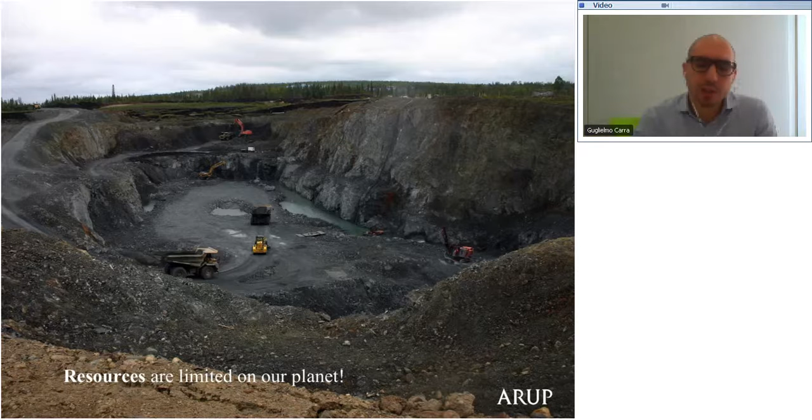So let me start with this image. The starting point of my presentation is the understanding of the fact that the world's resources are limited. So it is now understood that the traditional business model, which is linear and based on the constant exploitation of resources - things are made, used and disposed of - should actually change towards a model which is circular, in which things are regenerated and reused at the end of the life cycle. That's something that, for example, the energy business already understood many years ago, when about 25-30 years ago, part of the business moved towards the use of renewable energy resources, such as solar energy and wind energy. My point of today is: can we conceive a similar approach in construction and use materials that are renewable and can be regenerated?

So can we create high-performance systems and components from abundant resources that we have in nature, such as plants? And when I talk about plants, I don't mean trees, which are usable of course, but I rather think about plants that grow in our cities and on our farms. So with this idea and with these questions in mind, Arup joined back in 2011 a large European consortium of 12 other large European institutions and companies to actually explore further and research further this idea.

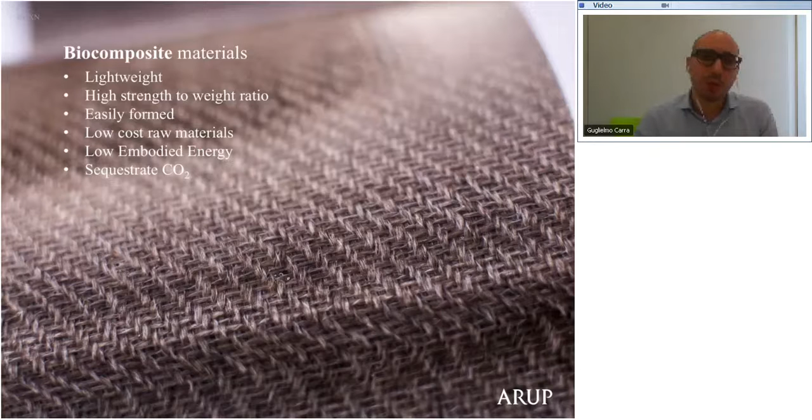What we have been doing has been thinking about using these materials at a larger scale in building construction. This implies that we should be able to improve the performance of these materials, both from a mechanical point of view and from a physical point of view, to make it possible for them to be used within the very stringent requirements of building construction.

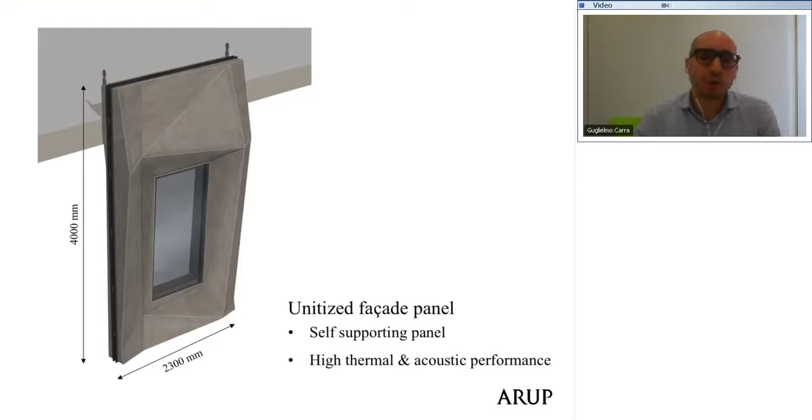So here you see one of the first systems that I want to show you today, which is definitely the most challenging: a modular unitized facade panel, 4 meters high, 2.3 meters in width. It's a self-supporting panel designed to achieve high thermal and acoustic performance.

If we look at the exploded view of the system, it is composed and designed to have two skins of biocomposite, one on the outside, one on the inside, connected to a timber frame all around the perimeter of the panel, with thermal insulation in the gap. The panel itself also has a glass unit.

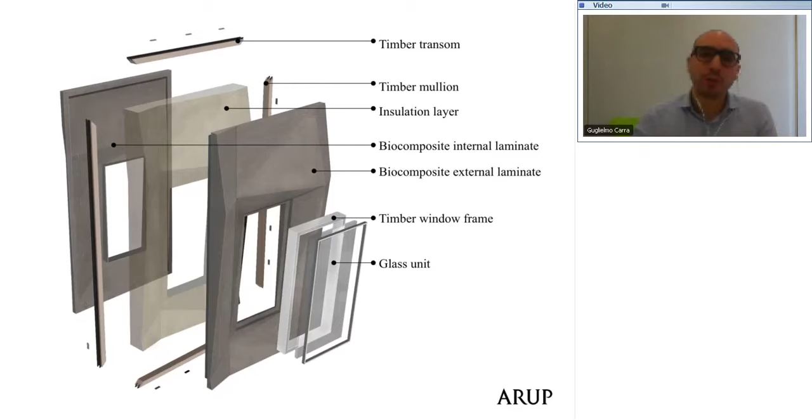The particular shape that you see here has been designed in agreement with the architect, 3XN, and there are two main reasons for this very complex shape. On one side, the idea was to improve the solar gain of the panel using a parametric approach, by modifying the top part of the panel itself.

As you see, there are two red dots, and we've been moving these red dots outside and inside the panel. With a parametric model, we've been calculating and assessing how much light was actually reaching the window.

By doing that and optimizing the shape, we optimized the solar gain for the panel for North European countries; in particular, we did the simulation for the city of Copenhagen, so that the part which is in shadow through the full day actually fits with the solar and energy requirements of the building itself.

The same approach can be changed for any city worldwide, and this particular effect we can play with the shape is guaranteed by the biocomposite being a material that is easily shaped into any form we might think about. I will come back to the process of manufacturing biocomposite later on.

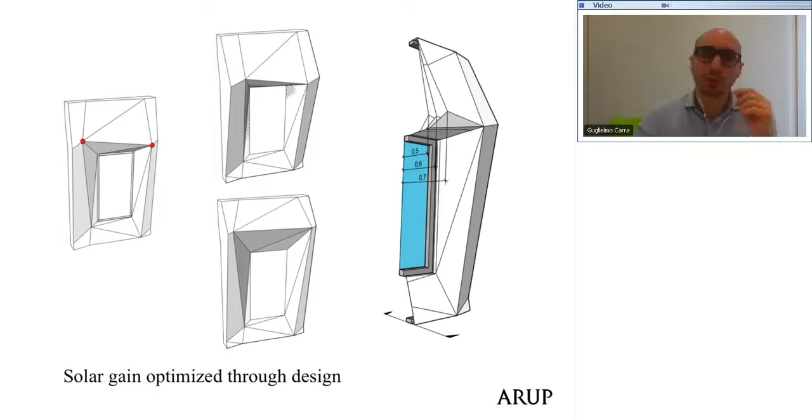On the other side, as I was mentioning, the particular shape of the outer skin was optimized to improve the stiffness of the biocomposite laminate. We did some structural calculations, and we proved on paper that the overall deflection of the system was fulfilling the requirements for building construction, even at the local level, with values above L/200, which is the deflection requirement for European systems.

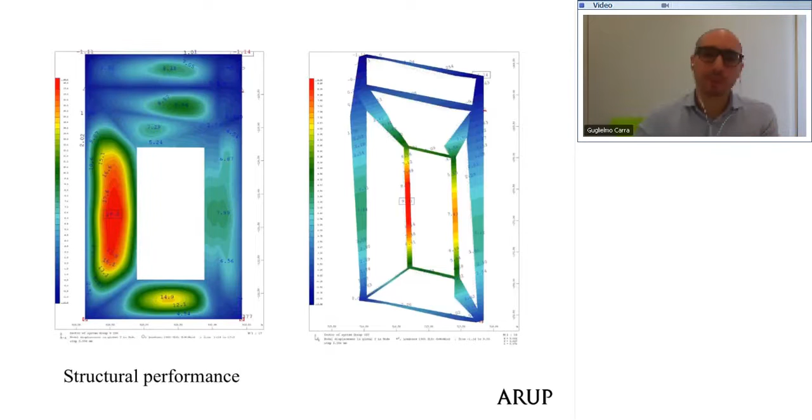Another very particular feature of biocomposite is its low thermal conductivity value, which is comparable to, and even lower than, timber. By using biocomposite, we reduce the number of thermal bridges in the panel itself. Therefore, the system performs far below passive house requirements. The total U value was about 0.38, compared to the 0.8 average for passive house standards.

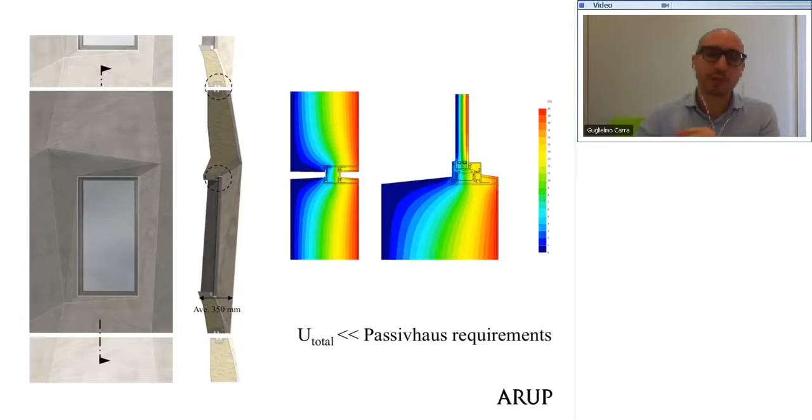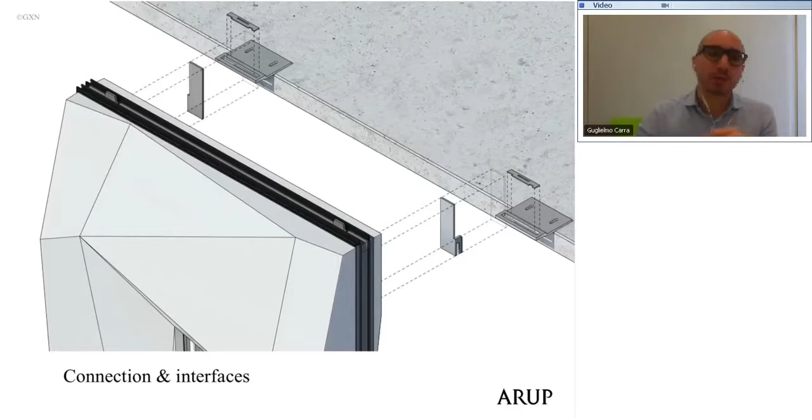In this image, you see that for everything not related to the shape and the system itself, we've been using traditional systems, for example the gasket line and the fixing system with the floor slab, because we wanted this panel to be potentially implemented in projects, which is something we're still looking for.

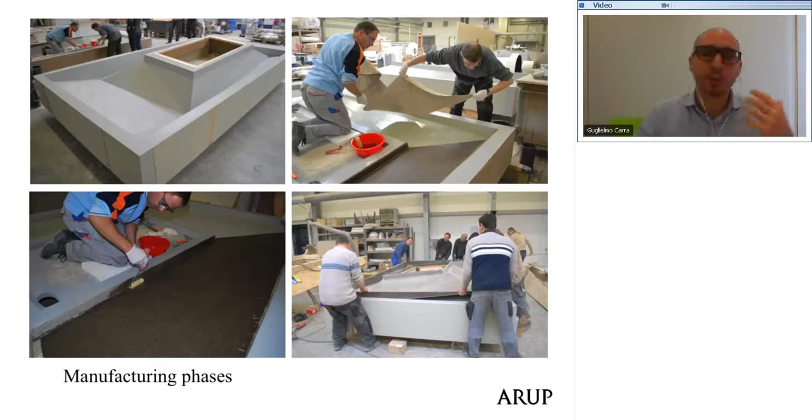Of course, this process is very labor intensive, so it has been used only for the phase of mock-up for the system. But nowadays, we can use processes which are much faster, improving the speed of construction and also reducing the cost of the system.

And here you see the laminate, the external laminate as completed. It has been a very long process to get to this stage, about 30 months of research together with the full consortium to optimize the performance of the material and the process, but finally we managed to create this very large outer skin for the panel in biocomposite materials.

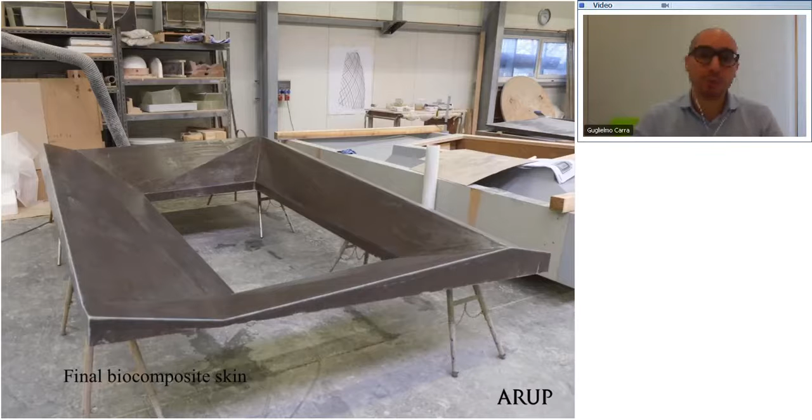We've been using, for this specific case, flax fibers. Here are two images of the mock-up completed, and these represent the first worldwide unitized facade panel made in biocomposite materials. If you look at the image on the top right, the zoom, you would actually see the very nice texture of the fiber right below the outermost layer of resin, which is a clear resin in this specific case.

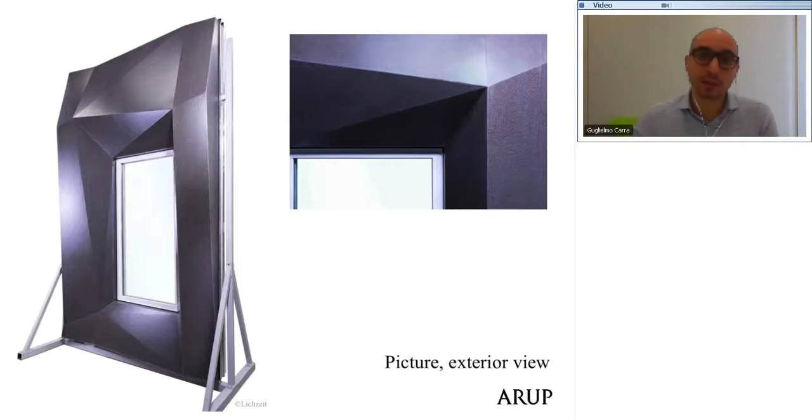At the end of the manufacturing process, we entered a phase of testing. Of course, we wanted to prove that biocomposites are suitable for being used in construction. So we have been testing this system according to the European technical regulations.

Here you see two images. On the left side is a wind pressure test, so the panel is facing the chamber, and on the inner side of the chamber wind pressure is applied. What is very interesting is that the overall deflection and the local deflection for the laminate and the panel has been far lower than what we anticipated. So the assumption we made during the design phase for the performance of the biocomposite was actually very conservative. The material can even do better, we can even think about doing larger things.

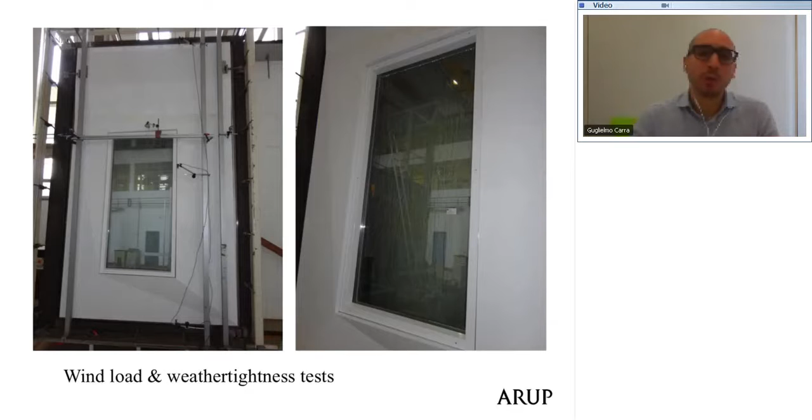We also exhibited this system in the UK, in London, in March this year, to showcase to a large community of people visiting the event the opportunity offered by biocomposite materials.

Coming back to the first point about the limited resources available on our planet and the fact that we want to develop materials which are actually recyclable, we approached the design by thinking about the disassembling of the system itself at the very end. So, as shown here, we believe the biocomposite skin can be completely separated from the other components of the system and separately recycled into the biological cycle, while all the technical components, the metal parts, the fixing systems, the rubber gaskets, can be recycled separately into the technical cycle.

Of course, this point is very crucial. In fact, for the biocomposite to be recyclable it shall go through a number of checks, and not all resins can be recycled. So a proper selection of the resin according to its use in building construction shall be done.

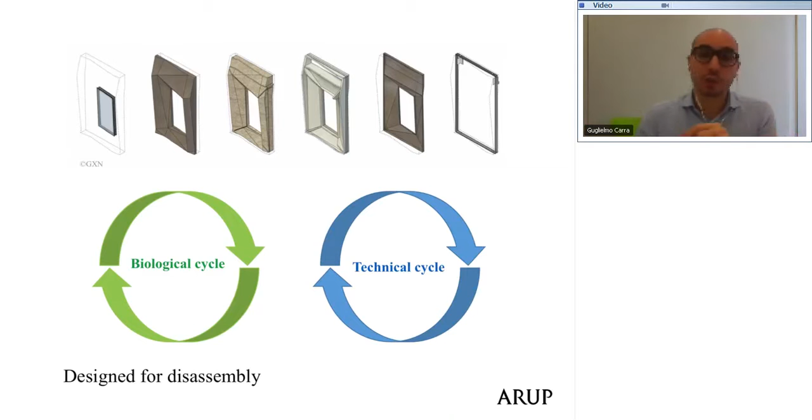I want to show very briefly the other three systems we have been developing together with this large unitized facade panel.

The first one is biocomposite rain screen cladding, and this shows the flexibility of biocomposite to be used in a number of applications in building construction. On the right side you see the mock-up that we showed at EcoBuild in London, and on the left side, the concept of the system.

It works as two components in biocomposite coupled together. On the outside, there is a very large flat panel in biocomposite. In this case, we use a resin called furan, which is obtained from sugarcane waste. So nothing from the plant is trash; the waste, called bagasse, can be used to make a resin. On the bottom side of this flat panel, there is a stiffening profile, also made with a linear production process in biocomposite, and these two parts are fixed to a metal substructure, which is needed for fire requirements.

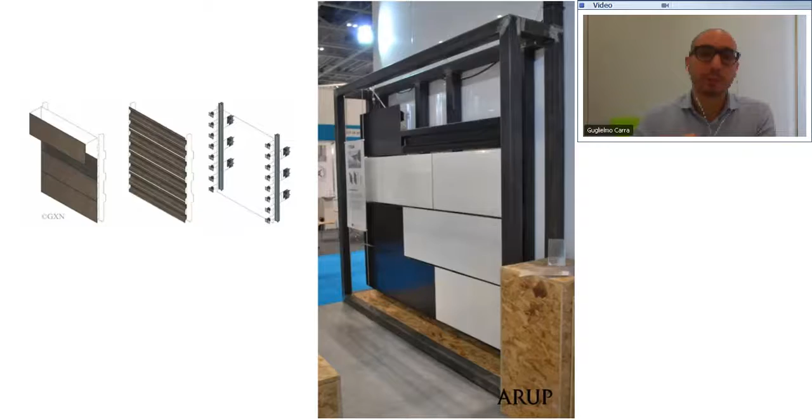The second system, very quickly, is an internal partition kit, a movable partition system. Again, on the right side you see the mock-up as completed, and the exploded view on the left side. In this specific case, we have been using the same resin obtained from sugarcane, connected to a timber frame with acoustic insulation in the gap.

The use of biocomposite is very crucial because of the structural performance. With a very thin laminate, we can achieve a very high stiffness, which is needed for impact loads, for example. At the same time, this particular resin, furan, has a very low VOC content, which is very good for the health of people occupying the building.

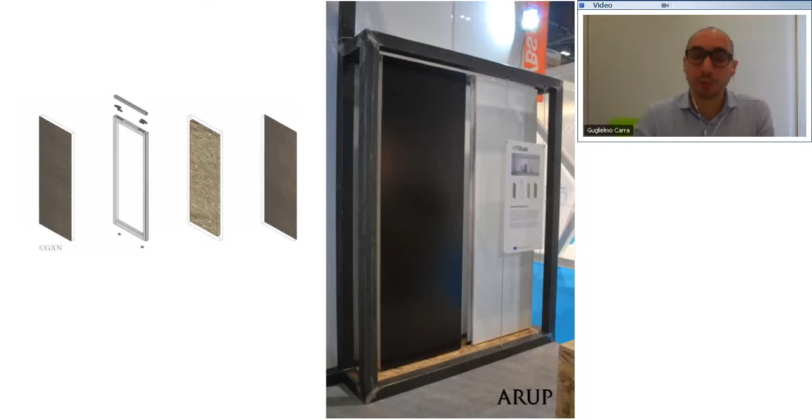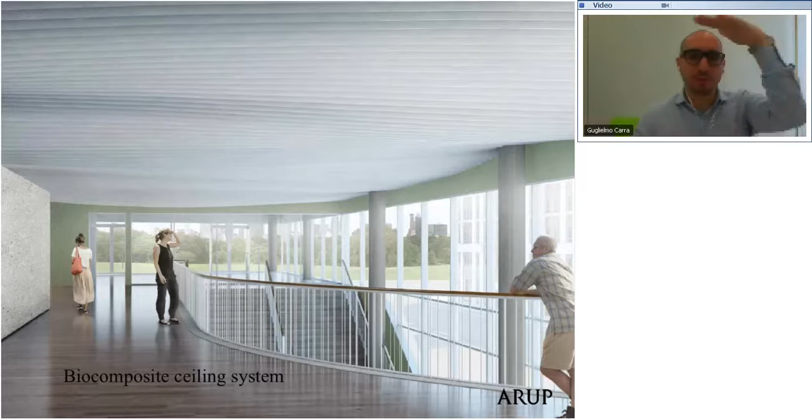The last system, which showcases the aesthetic benefits provided by biocomposites, is a ceiling system for interior use. Here you see a render of the system fixed to the ceiling of the building, and here an image of the set of vertical lamellas that can be freely shaped and adapted to any geometry. In this case, we have been using jute fibers.

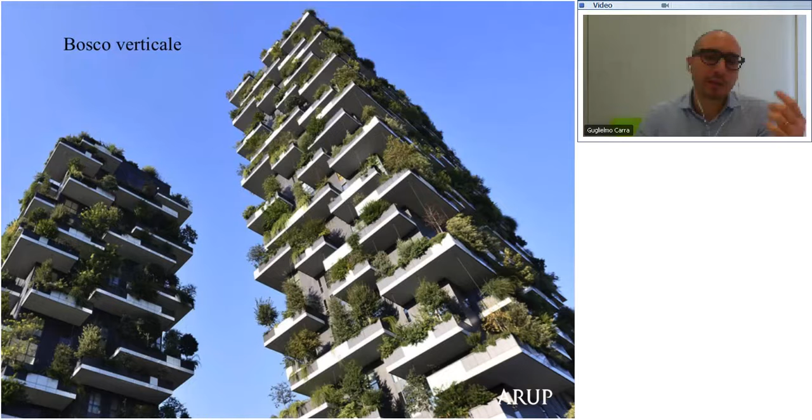So I move towards the conclusion by saying that nowadays we are trying to find potential applications. Being Arup, a design company and engineering consulting firm, we are looking for potential applications together with our clients of biocomposite into building construction. At the same time, we are looking for opportunities to extend the concept of using biocomposite in construction, so we think about the opportunity offered by buildings to grow plants, and these plants finally used for making components.

This brings me to the last slide, which is our vision about how the industry could embed biocomposite into the construction process, what we call the Urban Bio-loop, in which plants can grow into the buildings or at the urban district level. The plants can be taken to make the two basic elements needed for biocomposite: fibers on one side and resin on the other. The combination allows us to make building components that can be used in the building itself, and at the end of the service life, they can be either recycled or composted to allow new plants to grow.

With this, I conclude, and I'm ready to take any question, if any.

Thank you very much, Guglielmo, for this great presentation, giving us some insights into your system. I particularly liked the last slide, introducing this Urban Bioloop, which completely in an urban area produces and generates everything for your buildings.

So let me just follow up on this with a question: when do you think that would actually be feasible in practice? How long do you think it will take until we are actually there and can do this at a reasonable scale?

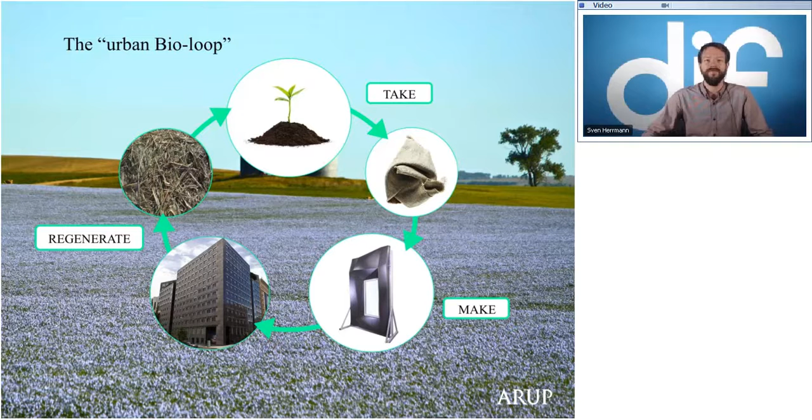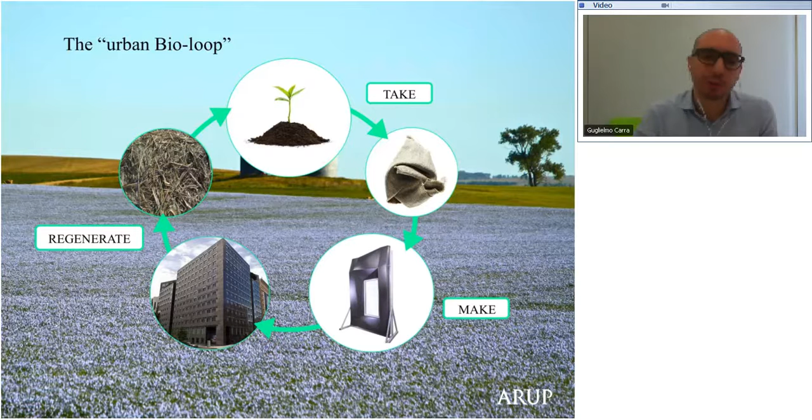What we proved in the project is that it is doable right now to use plants for building construction products. Of course, we've been using plants that do not grow at the moment in the city landscape—we've been using flax and jute—and we're doing research now to extend the portfolio of plants that we can actually use.

Regarding how long it would take for biocomposite products to be used in building construction, that's due to the approval process. We believe that in some cases, particularly for interior use among the systems I've shown you, we're very close to application, and we're now working to bring it into buildings in a short time frame.

Of about one year. Wow, that's great.